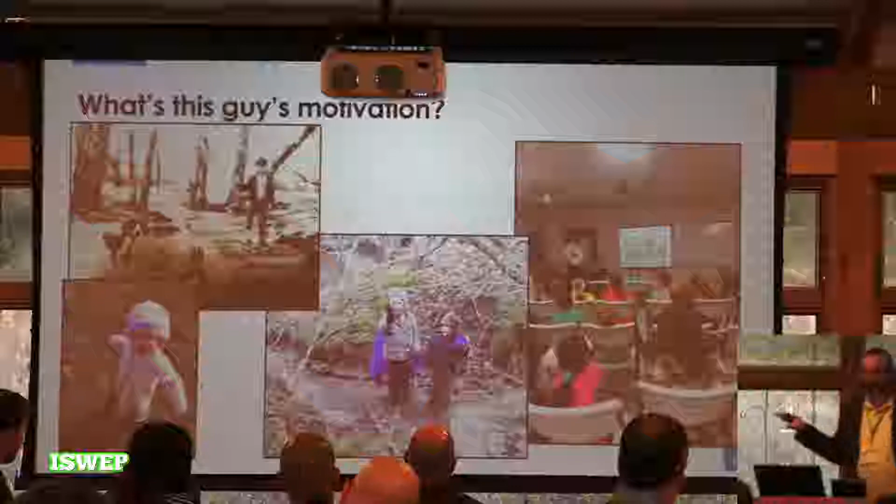That said, I would do it again in a heartbeat. It was a lot of fun. It'll still be terrifying, but it was fantastic. Okay, so it changed my view on how to do these presentations. And I don't want to insult anybody here, but a whole lot of this presentation is actually the exact same presentation I gave to the 3rd graders, starting with this one.

So the big point was, what does my dad do? I'm a water resources engineer, and this is what happens when I don't do my job. This is what I do my job. This is going to be my whole proposal interview next time. I'm just going to say, you didn't hire me. You hired me.

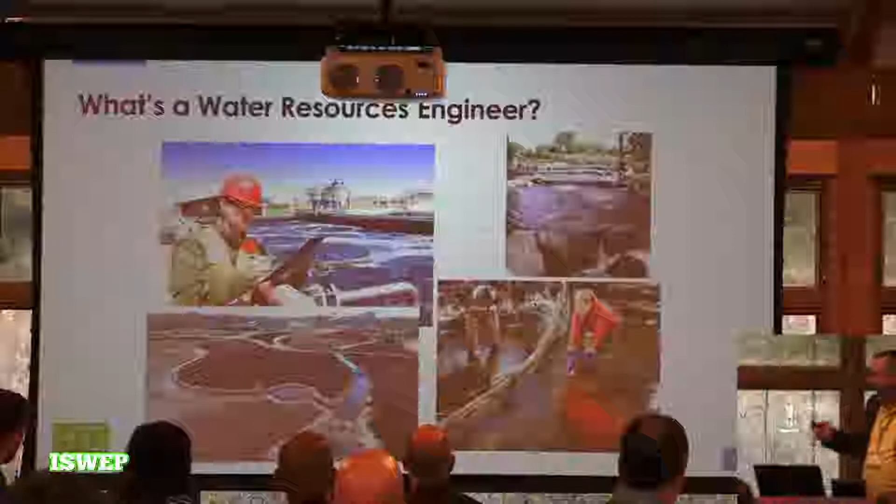Anyway, so they always wonder, what's an engineer? That's not what I do. I don't drive trains. Sounds fun. I'm not an engineer. This is a little bit more like what I do. And I put this up there, and then of course some kid's like, why is that lady poisoning the water? Like, I don't know, poor choice of internet copyright issue.

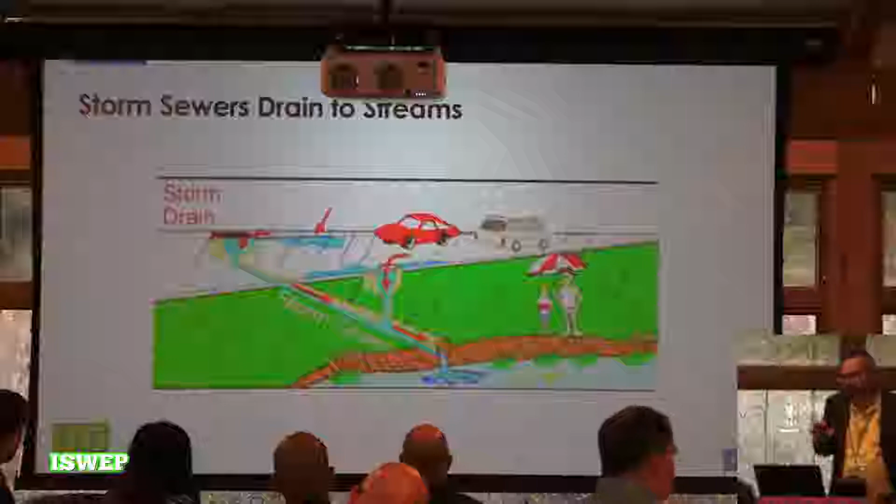Anyway, so big picture, we all know how water works. I was going to put some of my slides up about the hydrology cycle and runoff has changed and all that. I'm sure we'll see more about that, and I'm sure a lot of people get that. But this is how I'm explaining it to kids: explain to a kid what is runoff and water and why do we do what we do. You get to a point and you say, all right, so they understand the water cycle, rain, runoff.

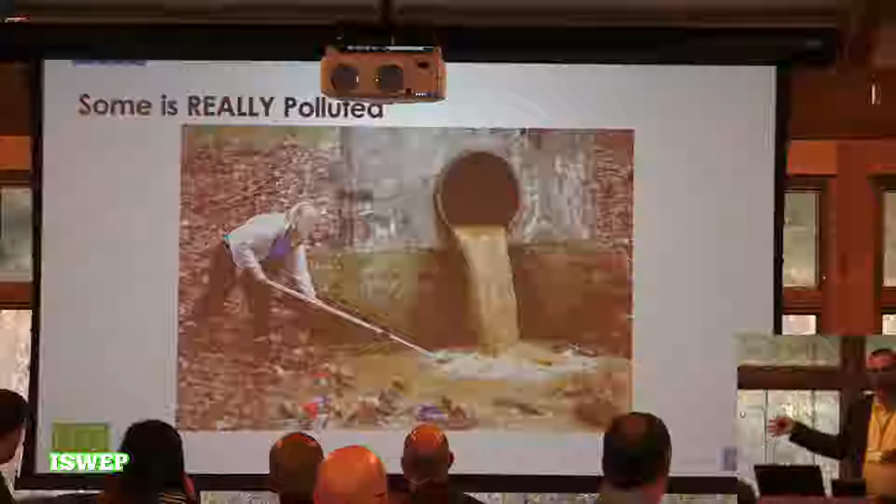But here's the nasty side, right? Water hits urban surfaces and it carries stuff downstream, and sometimes it's not so clean, and sometimes it's really, really not so clean, right? And this is the point where I say, okay kids, who wants to go swimming in here? Who wants to drink this? And they're like, yeah. And we do the give a hoot, don't pollute, and keep things clean.

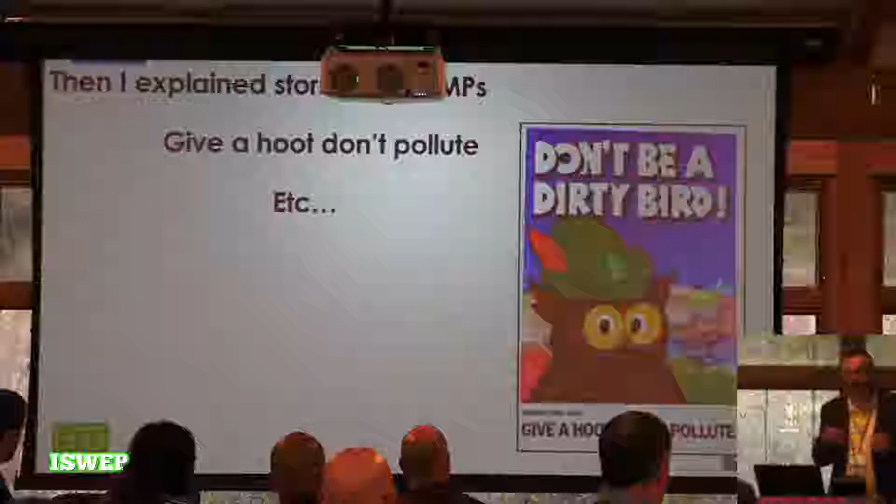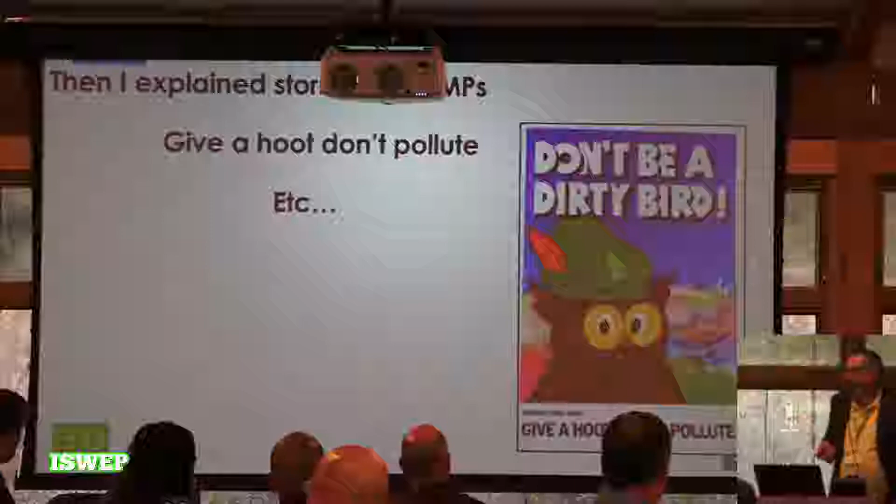And at this point, I have a little Lego streetscape model that my kid helped me build, and we sprinkle some pieces of styrofoam on it and some grape Kool-Aid. Actually, this is a great thing—if you ever present to kids, you can sprinkle grape Kool-Aid and then wash it off with some water and run it through a little cup full of soil and sand and stuff like that. Something about the Kool-Aid powder and the dye gets stuck to the soil, and the water that trickles out the bottom is clear, so you can just show them that the water gets all cleaned up by the bioretention cell. That's all great, and it went over like a charm, and they get all excited about not polluting. That's fantastic.

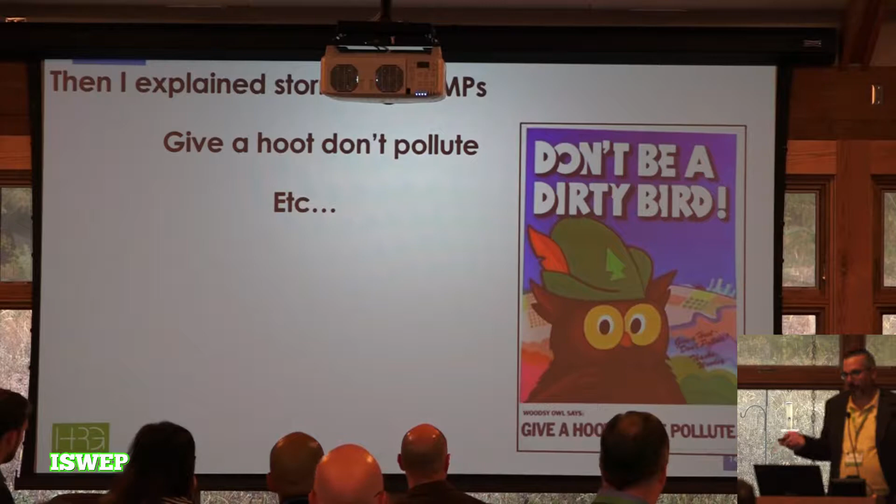But here's where we veer a little bit away from the presentation that I give to the kids, because we know that at the end of the day, this isn't the end fate. This is not really the end of the pipe—I mean, it's literally the end of the pipe, but not really, because there's the whole rest of the stream, right? This is now going into a surface waterway. It's going to the river. It's going to the ocean. The Gulf and the shrimp, and this is why we do what we do, right? This is why we're here, and this is why we're doing this kind of stuff.

And engineers like to think of things in this control volume, right? You draw a box around a certain experiment or a set, and things that go in and out, that might be balanced. But at the end of the day, we like to say there is no away.

Urban streams a lot of times are kind of that 'away' - that's where a lot of the stuff that runs off of humanity ends up. It passes through the system, and it's pretty ugly. I'm going to show you a lot of pictures of kind of ugly stream situations. I spend a lot of time walking urban streams and looking at this, trying to figure out how to fix them. A lot of times we're seeing all the erosion and the trash and whatnot.

As depressing as that can be, it's also motivating. It reminds me why I do what I do, and makes me want to go back to third grade again and give a presentation about why not to pollute. When I was a kid, they were doing the 'give a hoot, don't pollute' thing. We didn't solve that - this is still going on. Individual people make better decisions, and that's great. We just got to keep doing that. That's why we're doing what we're doing.

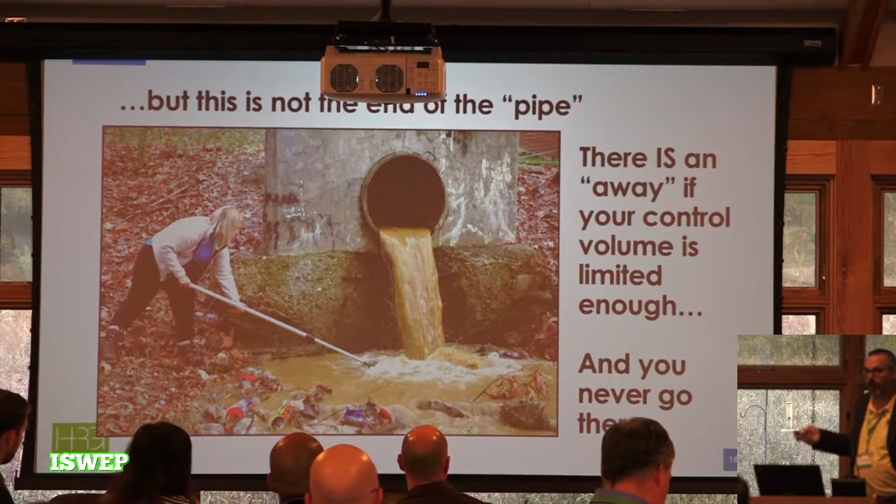So there is kind of an 'away' if you never go there, but sometimes we do go there. Apparently Wayne Peterson goes there. My kids go there, I go there. A lot of these urban streams are in residential backyards. Your kids go there, all the kids go there - I bet you did when you were a kid. If you had a stream in your backyard, or your neighbor did, after school you'd go down there and play, despite what it might look like. Maybe there was some trash, but you probably didn't think about it a whole lot. Nonetheless, whether you want them to be or not, they're not just an attractive nuisance - it's a de facto playground. Okay, enough said about that.

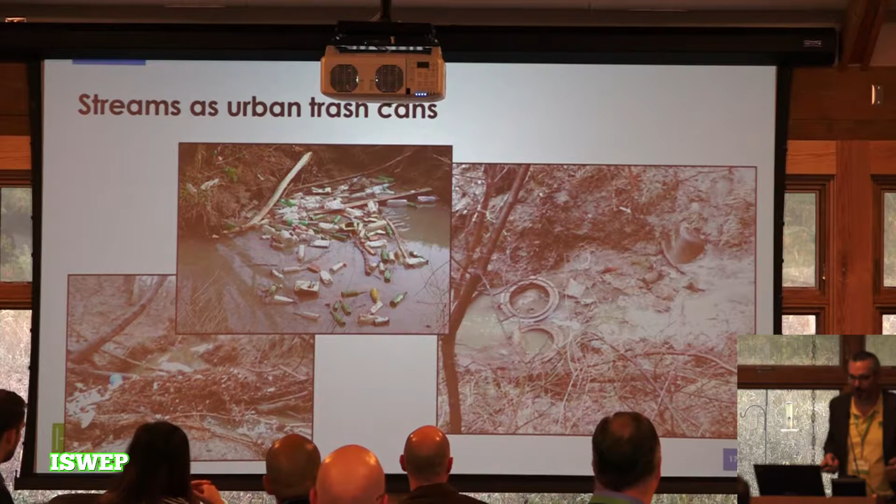Well, almost enough said about that. So these are the kind of things we see a lot. Some of this is legacy stuff, some of it's more recent. Obviously the floaters are relatively recent, maybe accidental. That's a cast iron bathtub right there that probably didn't accidentally wash away in a storm one day - somebody tossed it there.

This, you'll never guess what this is - it's actually the outlet structure from a stormwater wetland that I designed and built. In theory it's great, except the Iowa River is really high right now, so all this trash is floating in here. As soon as the Iowa River goes back down, that's going out to the river. We built this stormwater wetland to clean up water quality, and I'm sure it does, but it's also a trash collection point, and a lot of stuff makes it through. So as proud as I am that it's making things better, it's also a point where all this stuff collects, and we've got to clean it up as best we can.

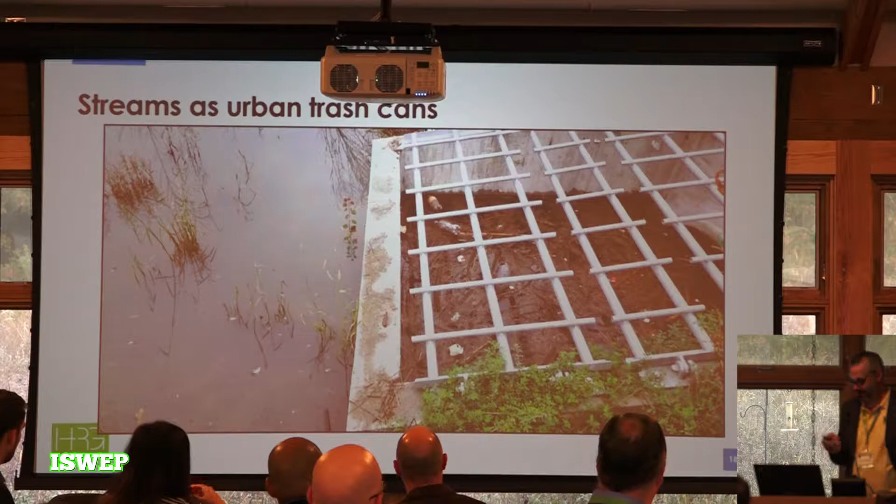All right, I promise it's not going to be this depressing the whole time. It gets better.

We also see the flotsam - so this is after a big flood event. Water went up, went back down, and deposited a lot of stuff. You get it.

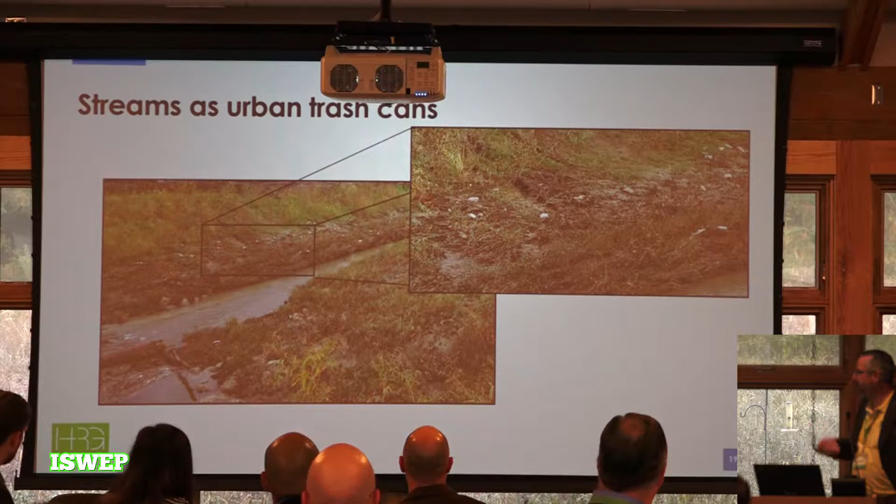Not just water quality, but obviously water quantity too. We've got detention standards now that are being enforced and enacted in a lot of new construction, but of course there's a whole lot of old development. The effects of uncontrolled discharge - I'm sure you all see it here and there - can be pretty monumental really. A lot of people don't really get down in the channels and see what it actually does.

It's 50, 60 foot tall banks that slough in every time there's a giant gully washer. It's kind of hard to tell, the scale's a little odd.

A lot of engineers like their grouted riprap, questioning the bioengineering or soft stream stabilization techniques and whatnot. So a lot of these engineers want to just grout the riprap and put a bunch of concrete in there. You could park a Volkswagen bus in this hole in grouted riprap that blew out, because it is not just a guaranteed fix.

Sanitary infrastructure, more sanitary infrastructure, a car about to go in. This chunk of bank went from being about - I don't recall exactly - something like 50 feet from the curb here. Now it's 26 feet from the curb. One single storm event blew out that bank.

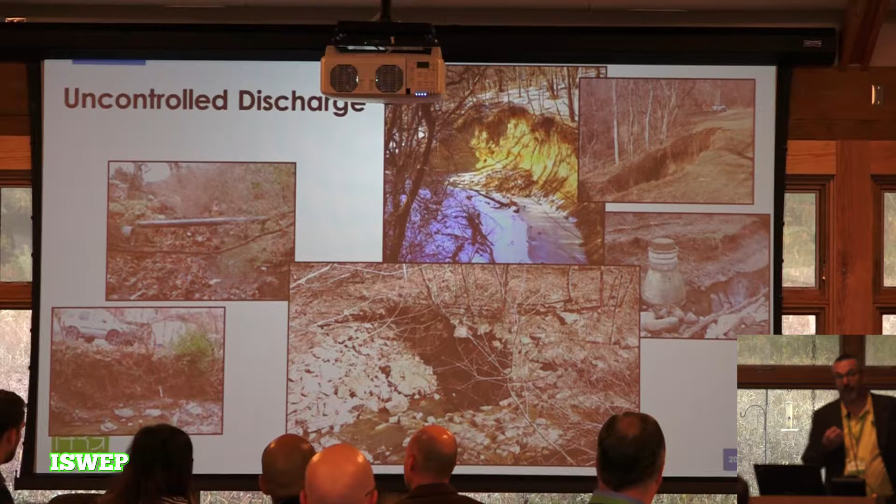More of the same, similar situation. This is about a 6 foot deep head cut at the end of an undersized box culvert that blew out the stream for 700 feet downstream. That was just from one single culvert that was undersized. It wasn't even necessarily an urban development issue, the culvert was just a little too small. It concentrated the force of the water and blew out the world downstream of it.

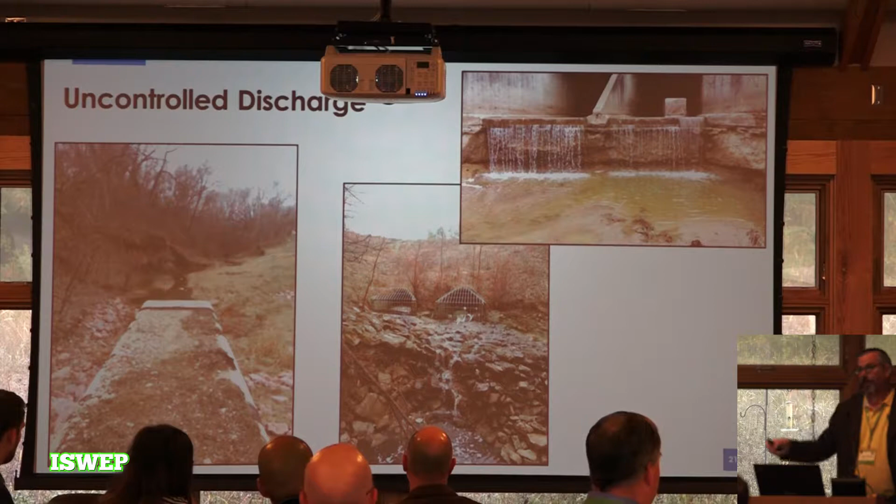And this is a fun one. We get this a lot, people say let's put in detention basins and hold back some of the water to slow down the flow, but we get it there as fast as possible with storm pipes. So we preach this thing about distributed practices, distributed detention, topsoil and stormwater management practices all over the whole landscape and built environment because of this.

Guess what this is over here? That's the detention basin, there's a storm pipe outlet here. The water was trying to get to the detention basin so it could be slowed down and protect things, and in one big event it blew out the trail. There's a house right next to here, it almost took out that really nice oak tree. This whole 'get the water away as fast as possible' approach can be a lot more destructive than people realize.

And detention alone, localized here and there once in a while, is not necessarily the fix. The water just needs to be slowed down everywhere.

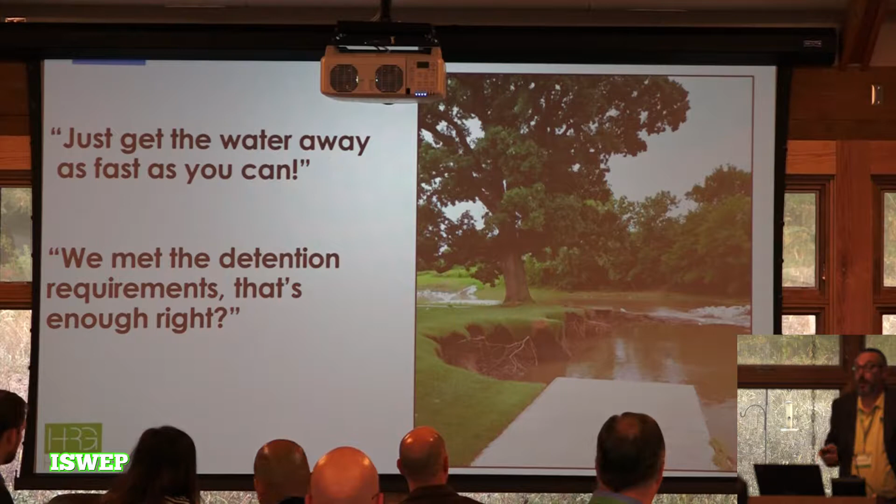Ben and Pat asked me to talk about some of the costs of this, because at the end of the day there are people that get it. You all came to a green infrastructure conference, so I'm guessing you either get it or you're interested in it. We deal with a whole lot of people day in, day out, in all walks of life - our clients, the cities, even in my own company, from folks who don't necessarily drink the same Kool-Aid that I do. So we have to speak to them in their own terms: costs. What does this actually cost society?

I'll come to that a little more in a moment. But the costs are effectively hidden if you don't go there. If you don't see the stream, or deal with the infrastructure every day, it's not your responsibility to make sure the infrastructure is safe. Again, this sanitary manhole is one log jam away from being knocked open and putting sewage in the stream. You can't really see it, but there was something like a 10-inch water main underneath here that was just about to be exposed. I'm sure they were having freezing problems and whatnot.

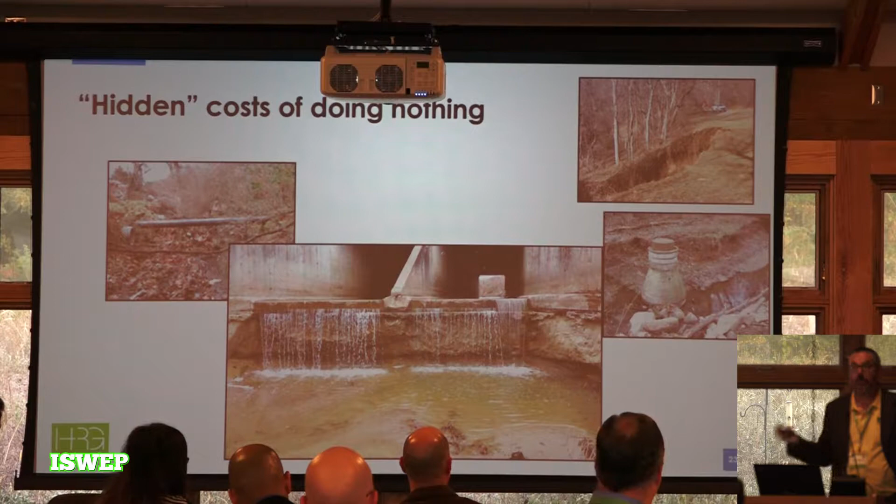There are huge costs associated with this, some municipal, some private. You really can't see it at all. This is like a 30 or 40 foot tall bank, and there's a swing set right up there at the top of the bank. I wasn't there when this failed, and I didn't document it beforehand, but from a dad's standpoint, it just breaks my heart thinking about some kid's swing set up there and how dangerous this is.

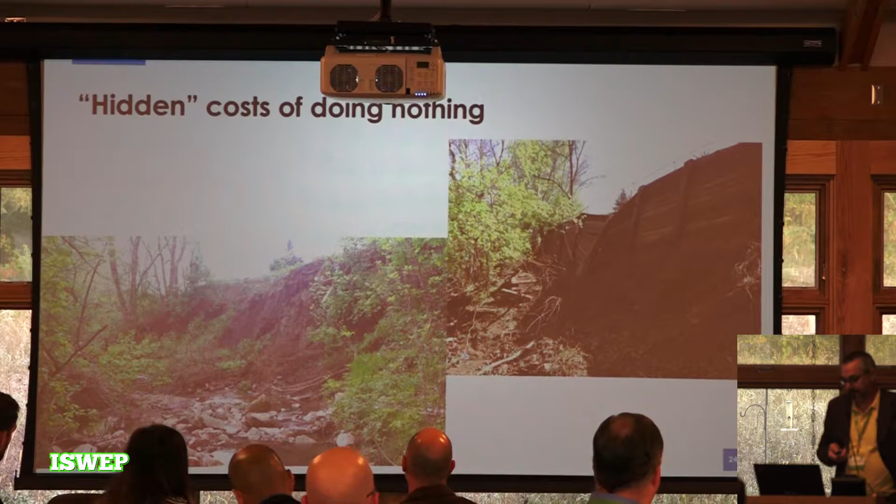So a retaining wall going in has already started to fail a little bit here, but you can see the footings for all these other posts are just getting ready to go. I couldn't get a good picture because it was so dense in there, but on the next lot up, people have a 6 foot tall privacy fence with a swimming pool right inside of it. They couldn't even see that the world was coming towards them, and there was a 35 foot drop-off until it started to creep underneath the corner of the fence, and they could see down from their swimming pool, 35 feet down to the bottom. This was all pre-detention development.

Just touching on this a little bit - I know Steve is going to talk more about detention basins and erosion controls. One theme here is stormwater BMPs and their sediment reduction capacity - this is an outlet from an urban storm sewer coming straight into a detention basin, and it's a giant pile of trash and sediment right there. So we think about these externalities and the motivations for doing some of these stormwater practices, and people think about the maintenance, cleaning this sediment out, it's so difficult - we've got to clean it out somewhere, they're going to have to maintain this sediment basin, maybe clean it out of the stream. So if nothing else, they give us a place to clean it out from.

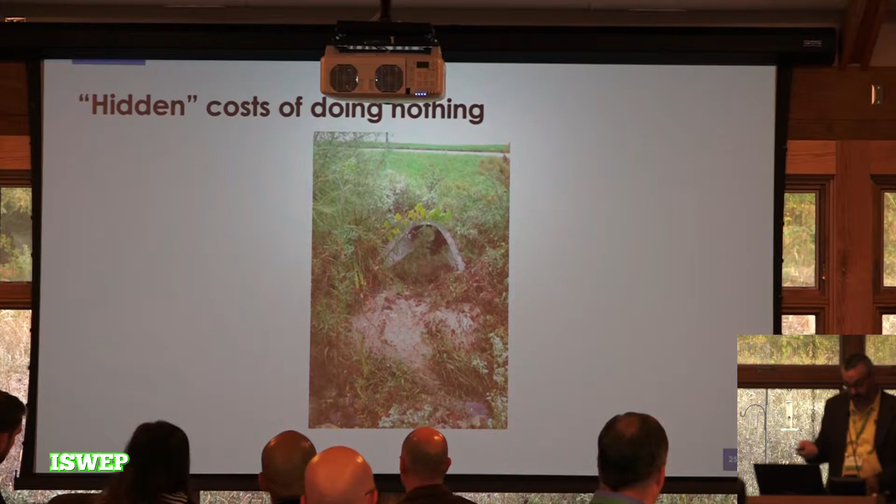And pre-treatment, I'll come back to that in a moment. A couple slides here on cost benefits of green infrastructure versus gray. This is a study done by other people, not me - they're a lot smarter than I am. They looked at a whole lot of projects and found that if you want to install green infrastructure as part of your overall project, costs are not necessarily more. We get that a lot - oh, it's too expensive, we can't afford it on this project. They don't have to be.

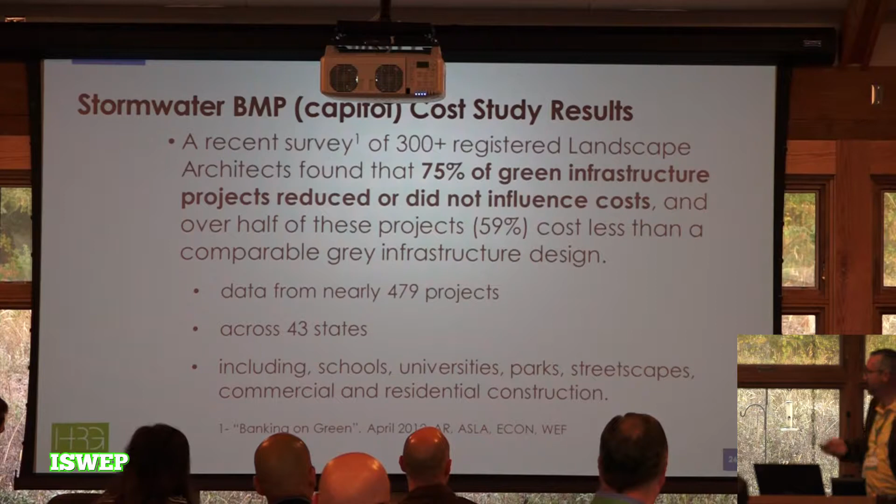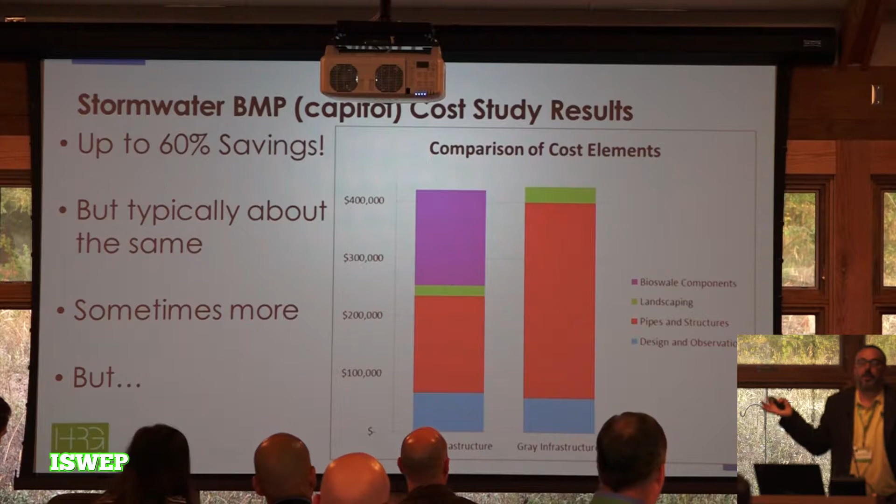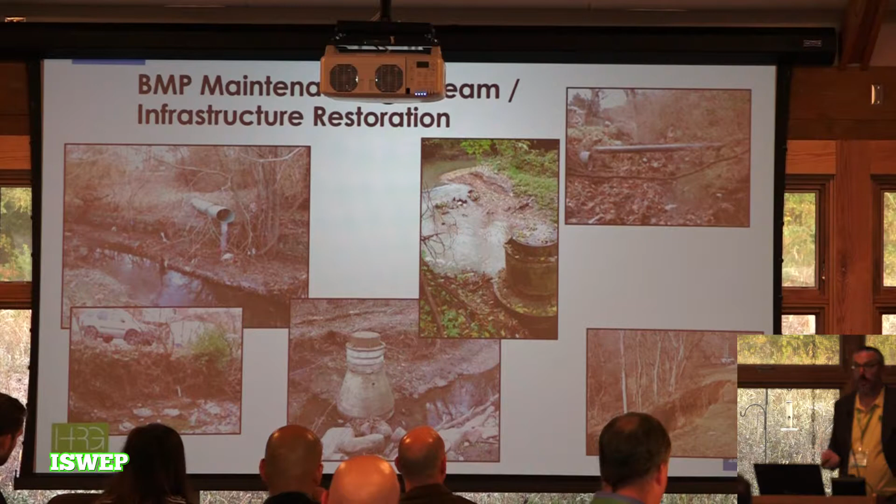But at the end of this presentation, I always have somebody that says, but what about the maintenance? You got to maintain these things. You're not including that cost because this is just the capital cost, right? Let's say it breaks even, or let's say it costs a little bit more. The long-term big picture thing is that we're protecting all this stuff, right? We're protecting the kids - you can't put a cost on that. I know it's kind of a cheap shot, won't somebody think of the children, but really, at the end of the day, that's kind of what it comes down to. If it's break even, or a little cost savings, or maybe it costs a little more, there are hidden costs associated that we're preventing, and that's the whole motivation and reason we do these things.

Stream restoration itself, we do a fair amount of that - about the least expensive I've seen for things you're even going to quantify. Obviously just pulling out some weeds and laying a bank back here and there doesn't cost too much, but I've seen a number of projects in about the $75 a foot range, if the owner does the work themselves with equipment they already own, and all they have to buy is some plants and maybe some erosion control fabric. More typically in our world, we see 150 to 500 bucks a foot.

That's the design and construction and public bidding and all that. It doesn't seem too terrible, but that one with the 5-6 foot head cut at the end of the undersized double box culvert, we had to fix it for 700 feet down. So you can do the math - we're pushing up on $500,000 just for that one fix, just in that one setting. I say Band-Aid scale because a whole lot of these really, honestly, are. We're fixing the visible part of the problem, fixing it where we possibly can, and doing what we can to solidify and stabilize it. We're not restoring the whole reach, not restoring miles and miles, not trying to put it back to some perfect ecological standpoint.

But still, hundreds of thousands of dollars - several of these are millions and millions of dollars. Not to mention infrastructure repair costs, downtime for the infrastructure, inconvenience for private citizens, tree loss. That's one of the things we fight a lot with when we're trying to get easements and whatnot. We're trying to fix a stream in somebody's backyard, and we unfortunately can't get in there and fix it without losing some of the trees, and that breaks people's hearts. That's how you have to do it sometimes. I'm a tree hugger as much as anybody else, and I do everything I can to protect them, but sometimes you just have to. Those are things you can't necessarily put a price tag on - how do I get my 200-year-old oak tree back?

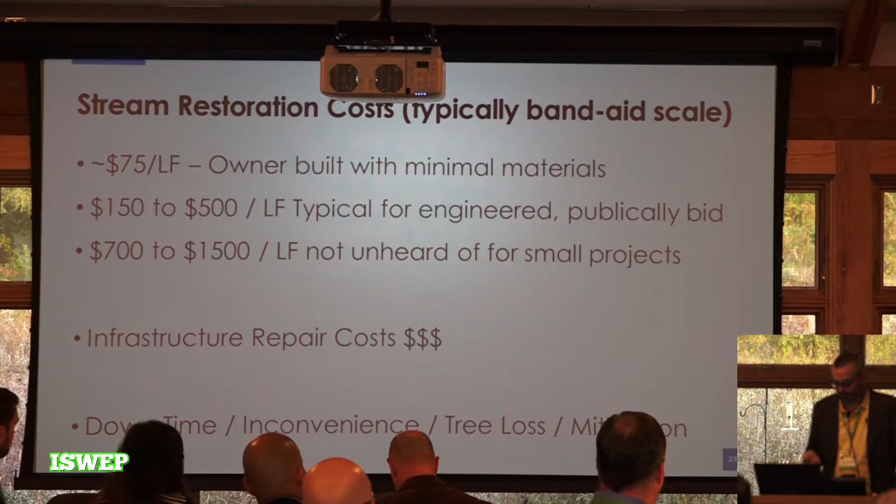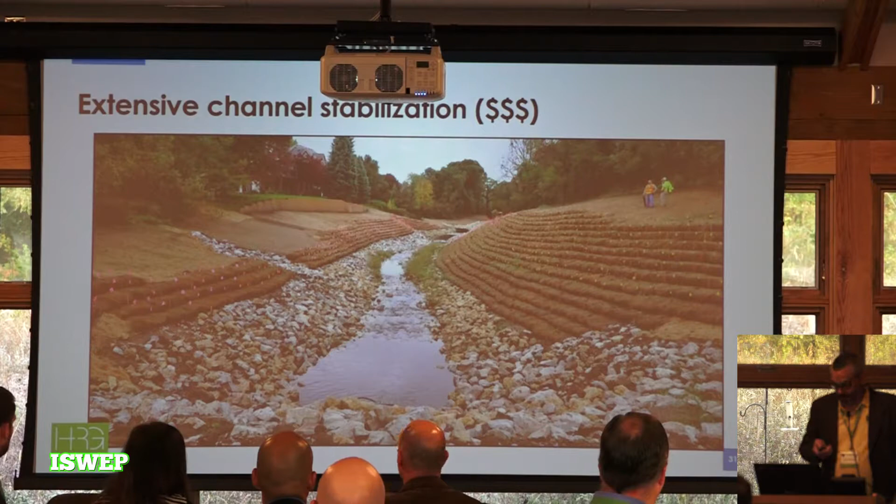So sometimes they're simple, sometimes they're really extensive, and yeah, this is what it takes to deal with unchecked development and undetained stormwater. Okay, you get it. So back to my presentation to the third graders - what do we do? We engineer a solution, we fix stuff, and we do things to prevent all these terrible things we're looking at. We say engineer a solution because I was talking to third graders trying to tell them what an engineer does. Obviously it doesn't require an engineer - y'all come from all kinds of different walks of life, and yeah, you get it.

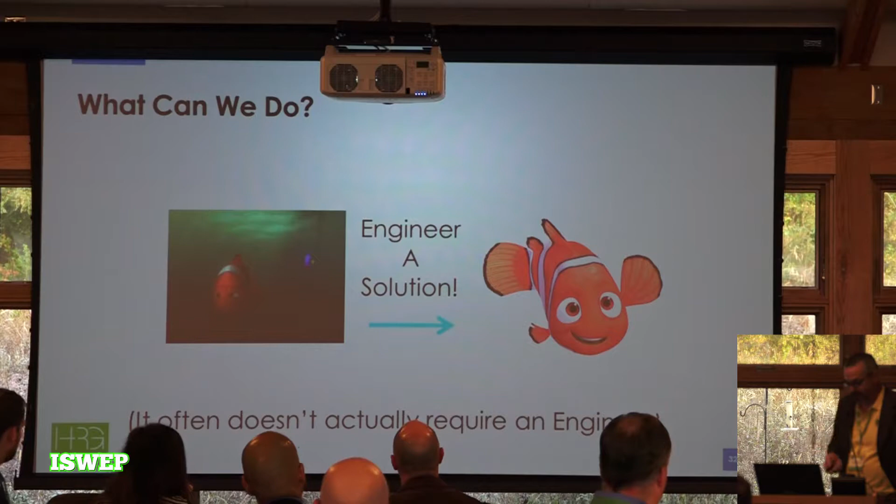So again, we'll spend a lot more time talking about these today - it's going to be great. We've got a bunch of great speakers, and these are the boots on the ground solutions, the low-hanging fruit that we're kind of on the forefront of getting implemented as much as we possibly can. And it's a learning process, right? We're all kind of developing this as we go.

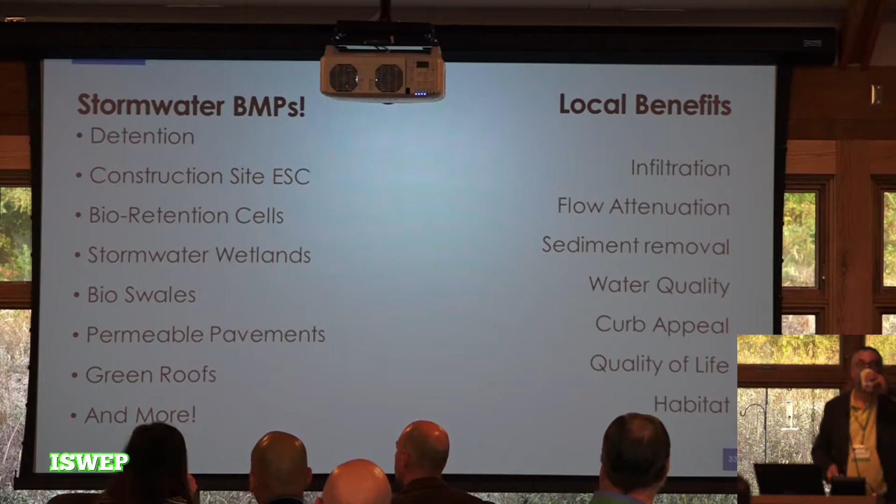I want to give a little shout out as well. In addition to post-construction stormwater practices like bioretention cells and bioswales, construction site erosion control and runoff is a huge factor.

You ask a lot of lay people what's the biggest water quality impediment in Iowa, and people say nitrate or this, that. It's sediment. It's always sediment. It obscures all the aggregate on the bottoms of streams, blinds all the habitat from the fish and invertebrates. Some of it comes from agriculture, but a whole lot of it comes from construction sites.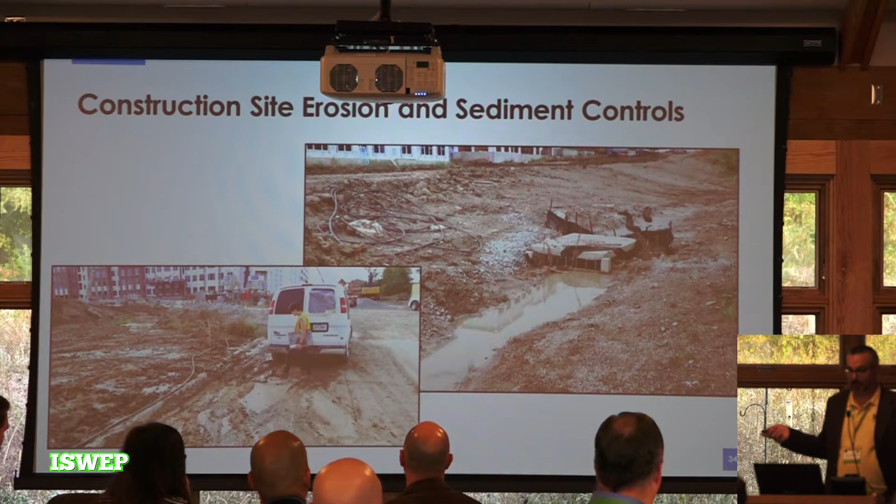This has been researched and documented, and these are temporary things -- not what we designed and built, but stuff that's temporary and in flux, and a lot of people don't give it much thought. We hear from contractors every day that, well, we're going to be driving over that again, so we're not going to bother putting in the silt fence. It's hugely important -- you can't get this back. You can't go back in the stream and get the sediment and put it back. You can't get your topsoil back. So we're trying as hard as we can to get more focus on this, that it's not just some temporary in flux thing. It's really important.

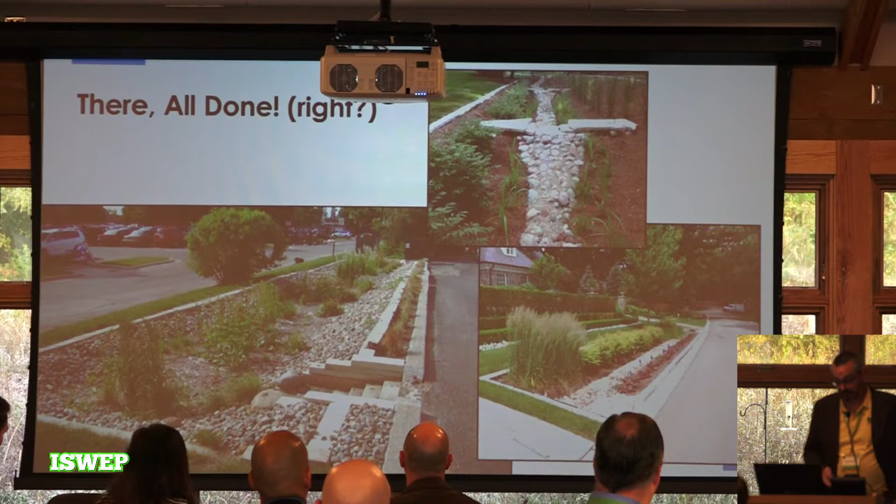One thing we're definitely learning is that we need pre-treatment on all these practices, desperately. They are great and they're filtering stuff, but there's a lot of trash that ends up in them, a lot of sediment that ends up in them, and somebody inherits these from the city. They have to clean it -- how do you do that?

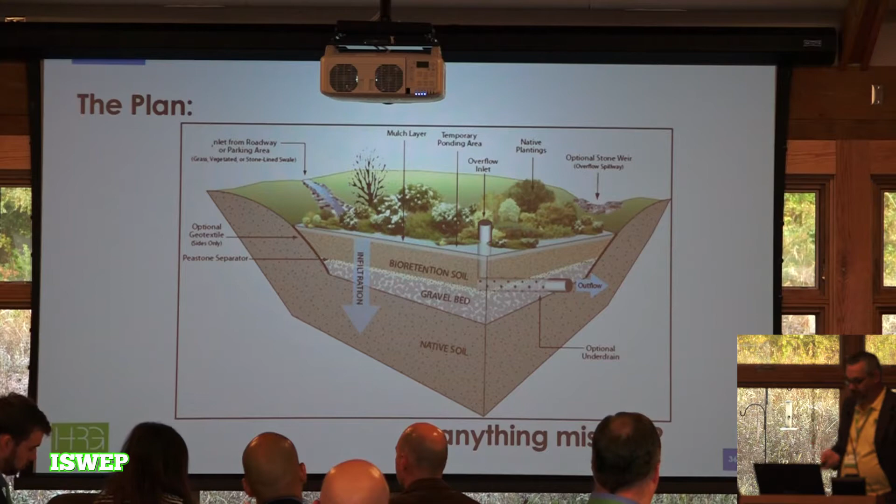There's also a mulch issue. We heard about this a little bit yesterday at Kara's wonderful green infrastructure bus tour -- there were some problems with mulch brought up. It tends to float, especially when it's new. It gets better as the stuff gets older and more waterlogged.

So we started adding mulch control netting to try and hold it down. Believe it or not, this one actually had that. Some people use rock mulch instead -- there's a few different approaches on it. This is one of those things I'm not saying I've got figured out. Y'all are smart, if you get it figured out, let me know. Maybe one of the other presentations later in the day will figure it out. It's definitely an issue -- it's not perfect.

We get a lot of crap from contractors and property owners saying your bioretention cell doesn't work because the thing plugs and it floods my property. Right, we get it -- it's not perfect, but we're working in the right direction.

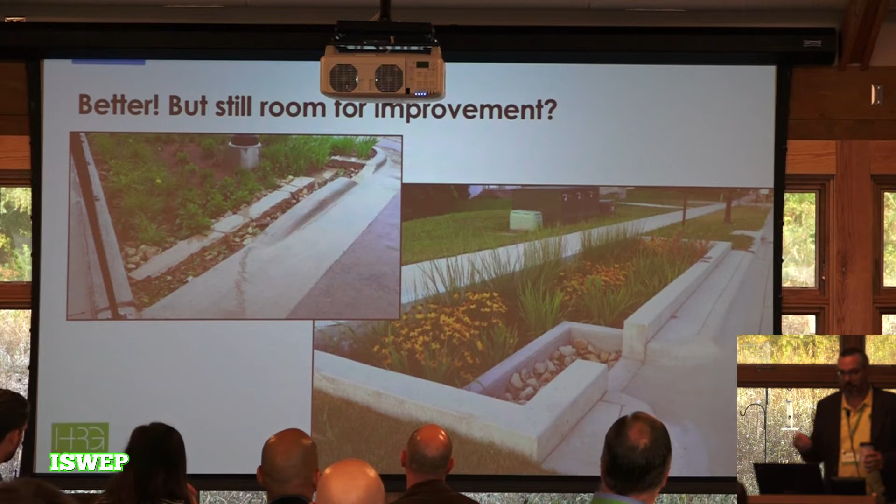And so there's something missing, something that has to be done. Maybe it's understanding, maybe it's the design, I don't know. But it got me thinking about it. Maybe we're just pitching this wrong. We've been telling, I don't know about y'all, but I have been telling cities and property owners for a long time, install bioretention cells, you're making the world better, you're filtering the water, it's gonna be great.

But for a long time, I think we kind of left out that the whole point of these things is to capture trash, to capture sediment. It has to be cleaned out. And I know some other folks are gonna talk about maintenance today, and I'm not trying to steal your thunder, but we should have, from the beginning, put a lot more emphasis on that. That is the point of these things. It's to clean the water.

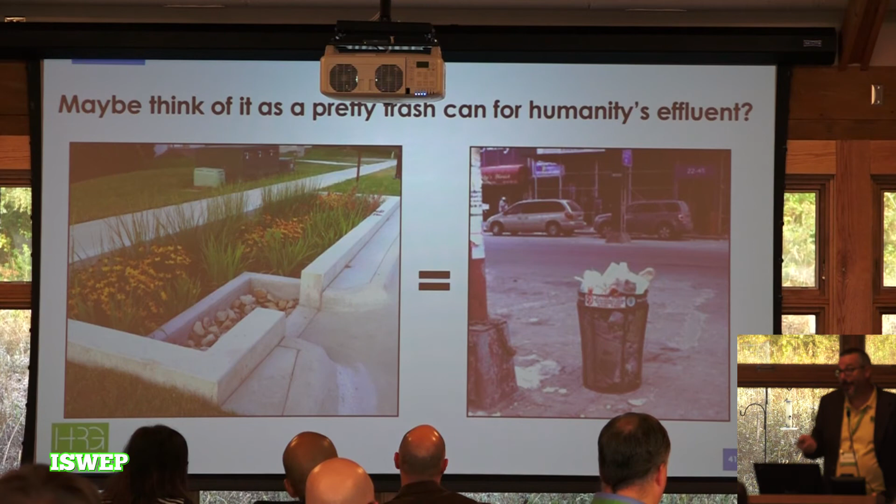The stuff you clean out of the water, you got to deal with that. You wouldn't imagine a trash can that you'd leave on the street for people to put trash in, so if your city isn't covered with trash, you wouldn't imagine just leaving it and not cleaning it out. Well, I mean, that one, I guess. But nonetheless, somebody's got to clean it out, right? So that's an important part of this. It's like really important. Otherwise, it kind of ends up like this.

That's actually in St. Louis, so don't worry, it's in none of your communities. But, as I looked at it, that stuff's been there for a while. And so it was a great idea. Somebody's trying to do the right thing. The follow through needs to be there. Okay, you get it.

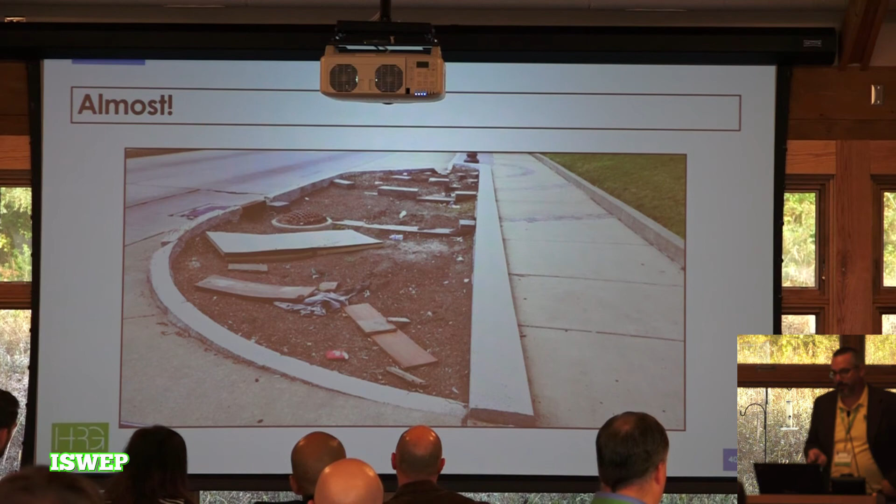All right, so to wrap it all up, in short, we talk a lot about pre-treatment for post-construction BMPs and forebays and whatnot, but in a way, all these various stages are pre-treatment for a lot of things. The big takeaway that a lot of these third graders got when I give this presentation is like, don't litter, right? That's the best pre-treatment. Just don't throw the crap on the ground. That's easy.

Stormwater BMPs are pre-treatment in themselves. Maybe they have built-in pre-treatment. Maybe they're pre-treatment for the detention basin, so you don't have to clean out the detention basin nearly so often. The detention basin is the pre-treatment for the streams, right? So it buffers the volume and it takes a lot of the trash out so that somebody doesn't have to get down there in the stream. So that we don't have to deal with repairing the infrastructure and spending $500,000 on putting 700 feet of stream back so it doesn't tear out our road and our water mains.

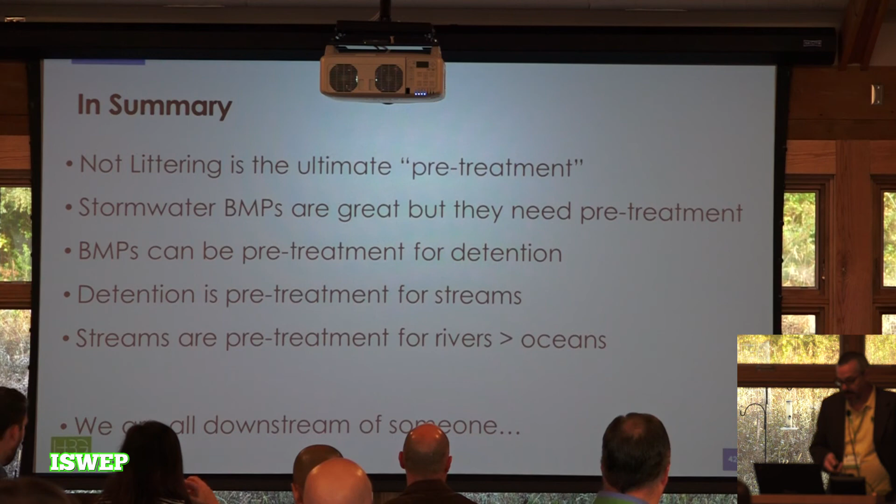The streams themselves are in a way water quality and quantity buffers for their receiving water bodies, the oceans and the lakes and whatnot. And of course, it all comes back to the philosophy that we're all downstream of somebody.

So with that, I hope I didn't depress you too much. Hope the motivation is there, but I would be happy to take any questions that you've got. And or save them and we'll do a little panel discussion at our presenter. So there you go.